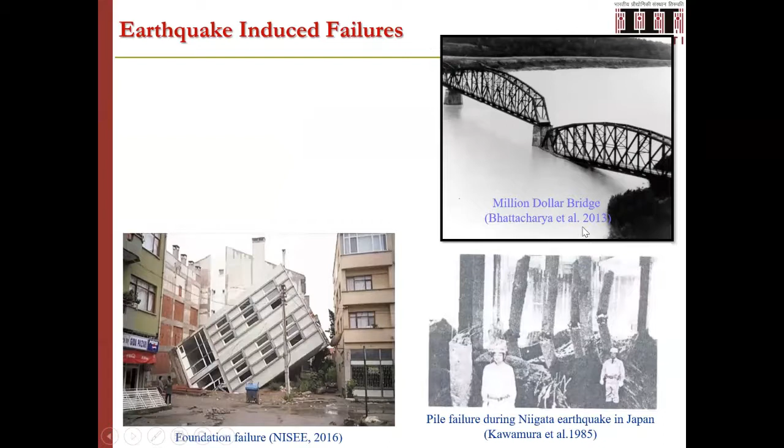Little more closer to these failures, if you see a bridge failure, a $1 million bridge failed, which was reported by Bhattacharya et al. 2013, and also foundation failure. If you see, the structure was totally intact. So the reasons for this one, is it superstructure failure or foundation failure? Of course, the examples we are showing here are not structural failures. The foundation failures are significant here.

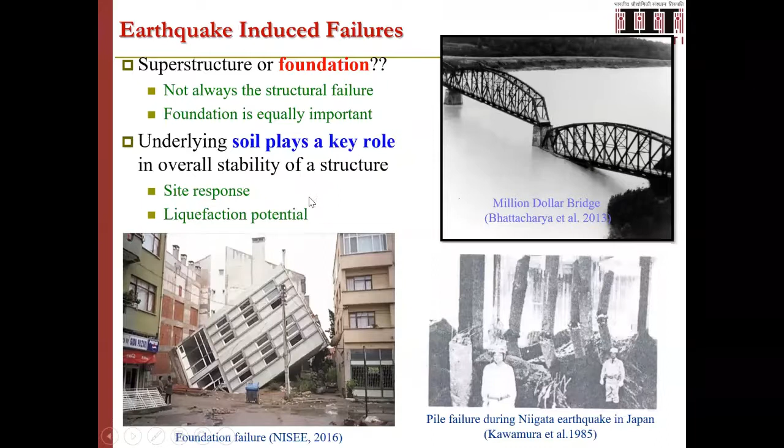So in general, in all the failures, not really the structural failures, some foundation failures also will be there. The underlying soil for any structure plays a key role in the overall stability of that particular structure, in terms of the site response to a particular earthquake motion, or in terms of the liquefaction potential at that particular earthquake condition, how it would behave. So that's how it will define the whole earthquake scenario and disaster scenario.

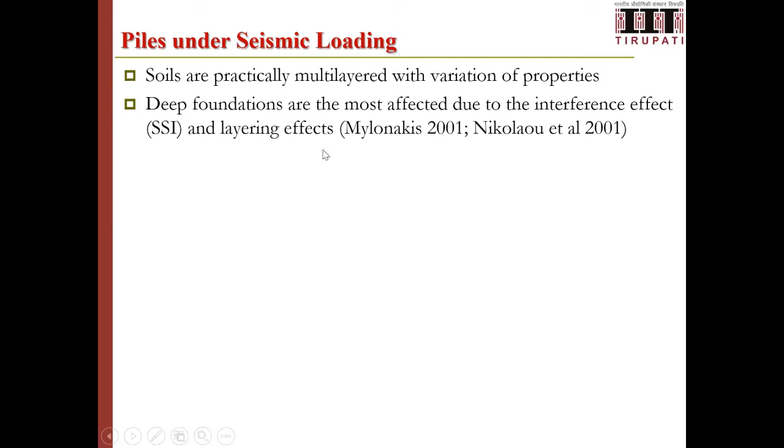So how do piles behave under seismic loading? With these quick examples, let us put out some points here. Soils naturally exist in multi-layered soils with variation of the properties. So this is one point to note. There is a different contrast in the layer properties and layer behavior under a particular given earthquake condition. And in many of these earthquake conditions, the deep foundations are most affected due to the interference effects and also layering effects, which generally affect the whole pile foundation behavior. So these ground conditions strongly affect the pile behavior in terms of changing the failure mechanism.

There are different failure mechanisms. I'm not going into details like bending failure and buckling failure, etc. So the failure mechanism will play an important role in the design. And the location of the zone, the ground where it is located, what is the seismicity of that particular condition, also significantly play a role in the performance of piles under seismic loading.

And particularly, the problem of soil liquefaction significantly affects the pile behavior. When the soil is going to liquefy, there is a substantial loss of strength and stiffness because of the increase in the pore water pressure. So the lateral confinement of the pile foundation would be lost. Then obviously the pile behavior would be totally changing. The natural frequency of the whole ground would be differing, and the response to the particular earthquake motion would be differing. All such issues would be arising due to the soil liquefaction condition.

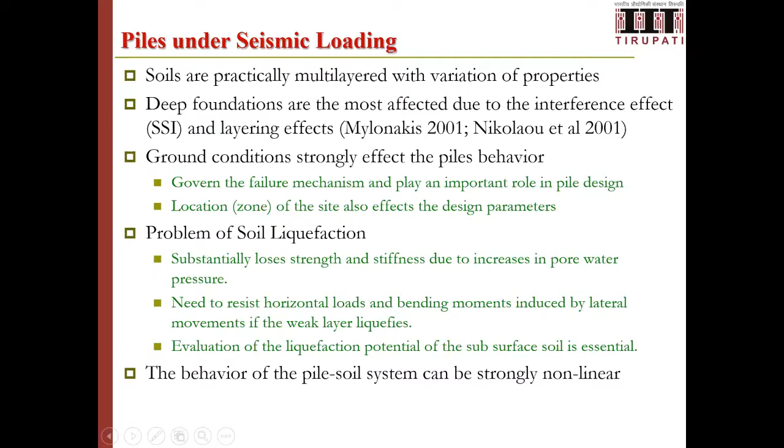And when the particular ground is subjected to the earthquake condition and also the possibility of soil liquefaction, the whole pile-soil system would be going into non-linear conditions: non-linearity of the soil behavior, non-linearity of the pile-soil interface behavior and pile behavior, etc. All those things would be coming into picture, which completely make the whole problem a complex dynamic soil-structure interaction problem, which we need to handle to solve this particular one.

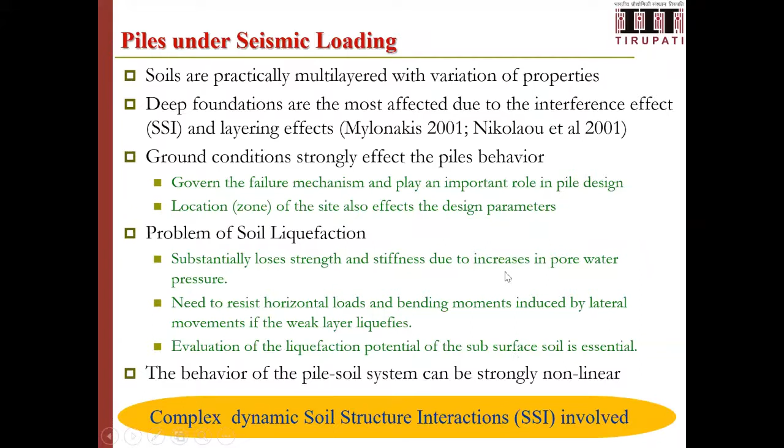And surface earthquake waves which are generated from the source travel to the site, and from the site bedrock they travel upwards, right? And then it affects the structure. So we need to take all these effects into consideration while analyzing any structure for seismic assurance, stability assurance. So considering all these things, this is an integrated seismic analysis strategy for any geotechnical structure, we can say, but particularly it is mentioned here as a pile foundation.

So what do we need to have? We need to have different input parameters. One is the seismic hazard assessment of the particular site: the PGA values, the magnitude values, the nearby seismicity, past earthquake levels, all those things we have to study. And at the particular site where the structure is located, the ground profile and possible groundwater conditions are required, and then the type of structure that is coming, what are the loads, etc. Those details also need to be there.

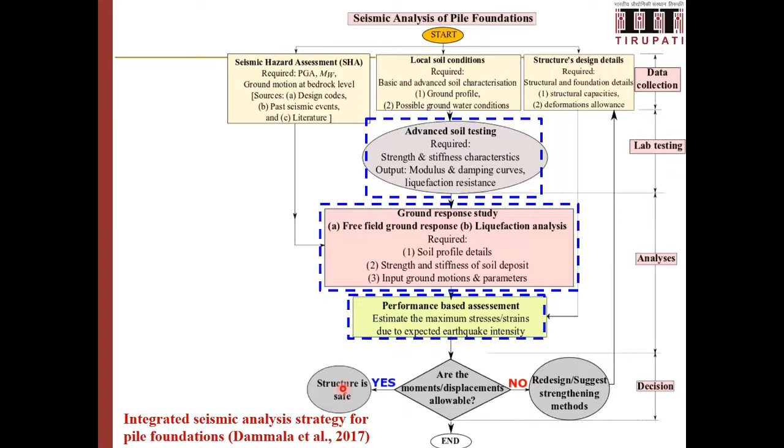And then we have to do the performance-based assessment. The particular structure analysis needs to be done to see whether the structure is performing well or not. If the performance criteria is satisfied, it's fine. If it is not satisfied, then we have to revise the designs, whether ground modification, pile foundation design, or superstructure modifications, etc. Finally, we have to close whether the structure is seismically safe. So in this whole process, there are various steps involved.

Step one is the quantification of the seismic hazard. As mentioned, we need to obtain the expected PGA, moment magnitude, etc. And when a structure is a complicated, very sensitive, huge budget structure, one can perform the site-specific deterministic seismic hazard analysis, DSHA, or probabilistic seismic hazard analysis to get the ground motions at the particular site. This will be done for very highly sensitive structures, for example, nuclear power plants. Otherwise, we can also use other literature data, and for normal general structures, we can use the code provisions for quantifying the seismic hazard or seismicity of a particular area.

Coming to the second step, site characterization and site response analysis, where we need to obtain the soil information in terms of layering and also dynamic characterization, liquefaction potential, etc. The obtained parameters shall be used to conduct the free field ground response analysis by any of the methods available. And the data obtained from these two steps will be used for performing the integrated seismic analysis, considering the superstructure and the ground condition effects, to get a complete picture and complete performance behavior of the intended structure under consideration.

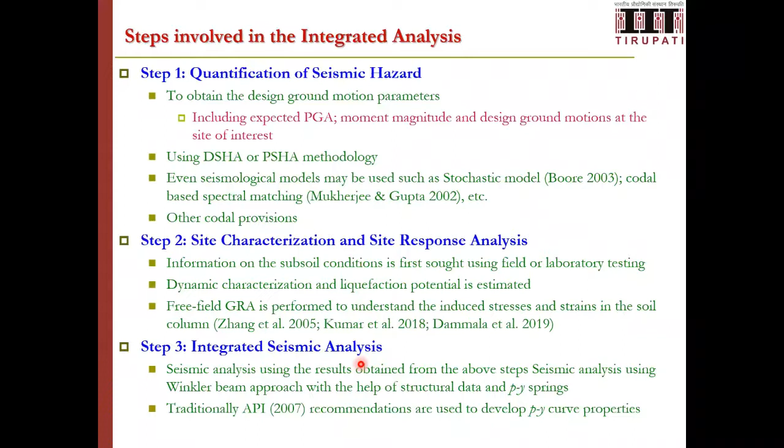Then comes the third stage, seismic analysis of deep foundation. The objective of the seismic analysis is to estimate the induced stresses in the pile elements due to external loading, and also the resulting bending moments on the pile. That is what is important. We have to make the piles strong enough to withstand the shear forces and bending moments generated in the ground due to the earthquake motion. Various methodologies can be adopted. Initially they were all based on the subgrade reaction based Winkler approach, which several researchers have applied. Here the soil is modeled as Winkler springs, the pile element is considered by different methods, and together they get the response of the structure.

Then we can have the advanced continuum approach where we completely model the ground structure, etc. by appropriate numerical models, for example, finite element method, boundary element, or finite difference method, etc.

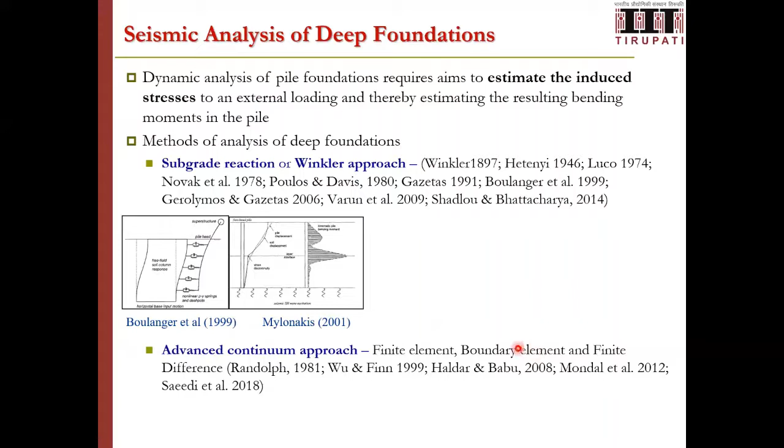Several studies are there, and then one can adopt the physical model studies. For example, if the structure is very complicated, they can go for physical model studies like 1G shaking table tests, centrifuge tests, and full scale load tests, and all.

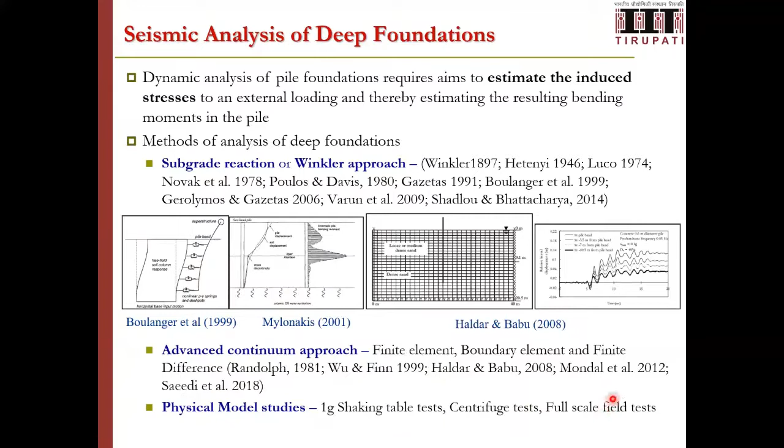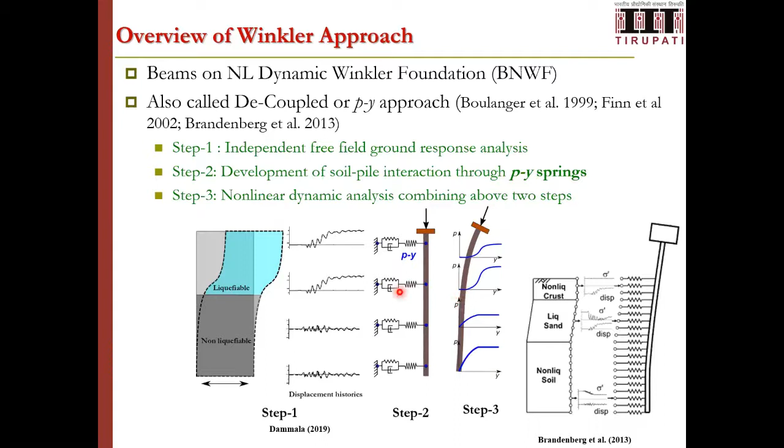So the ground response obtained at different spring levels will be given as an input motion to the springs, and accordingly we can obtain the response of the pile, so that the complete behavior can be studied.

In the whole scenario of this problem, finding the p-y springs is a very governing parameter. Of course, there are codal provisions. Generally, API 2007 recommendations can be followed to find the soil springs.

However, the API code generally provides only for standard soil without considering the liquefaction effect and associated decrease in strength value. In the case of liquefiable soil, certain modifications need to be adopted considering realistic conditions. One is to neglect the total soil springs in the liquefied zones, so that area will not have any lateral support.

Or then treating the liquefied sand as a very soft clay having very low strength can be taken. Or another method is the P-multiplier approach, reducing the strength of P-y curves by some factor, which was recommended by Brandenberg et al. in 2007.

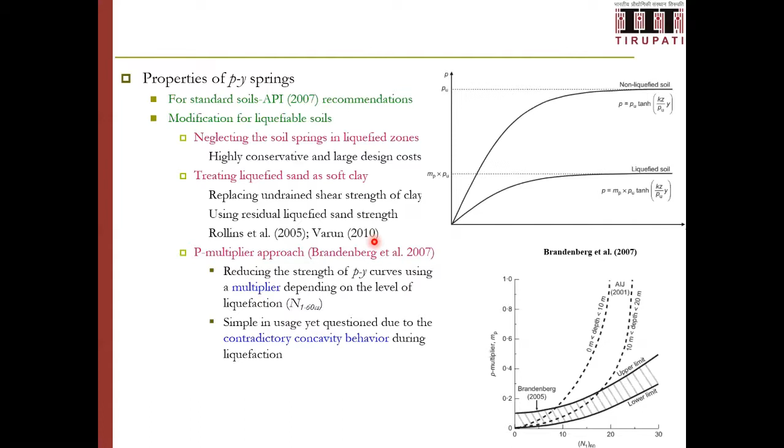So based on these methods, one can choose appropriately. The soil strength can be deferred, the spring constants can be changed considering the realistic scenario of the earthquake condition. So this is the whole strategy of dealing with the study.

Now let me quickly take the example application considered and presented in this particular paper, to show the whole strategy of how it is implemented: a pile supported structure in a highly seismic zone, that is the Tezpur city of the Assam zone, is taken.

The Assam and Tezpur city is marked as zone 5 as per IS 1893-2016. In this particular area, two configurations of pile foundations were taken: one is a single pile having 0.6 meters diameter and 26 meters in length, and another is group piles, 2 by 2 group piles, a 4-pile group of similar geometry. The strength of the material has been taken as M25 grade RCC concrete.

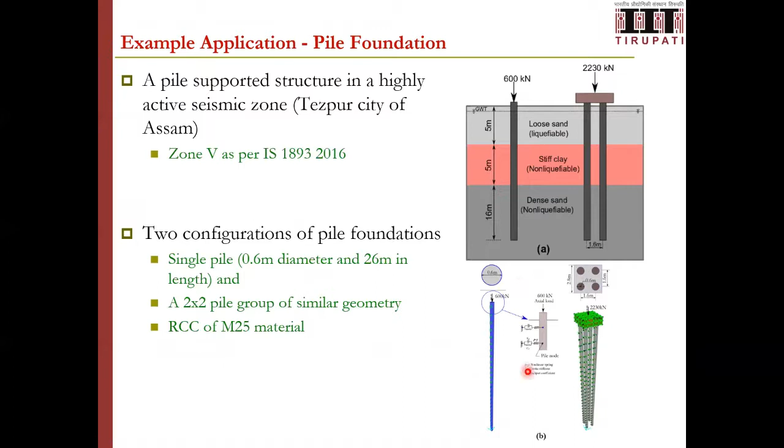Now we'll take the step-by-step approach to demonstrate the whole thing. The first one is the quantification of the seismicity. The particular Tezpur city, Assam city is shown in this area, the northeast zone.

If you look closely, what is the seismicity of this area, what are the number of faults, what are the previous earthquake data, all can be seen in this figure. Of course, this data is obtained from literature. Basically Raghukanth et al. has thoroughly studied this particular earthquake scenario, and also they generated a stochastic synthetic ground motion for this area, considering a very high earthquake magnitude of 8.7.

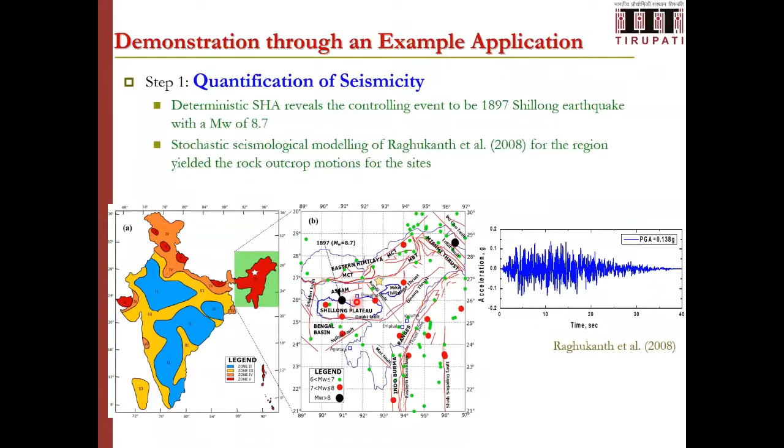Because this literature is currently available for this particular area, we have adopted the Raghukanth et al. ground motion, whatever is recommended in his paper, considering all the seismicity of the area and other parameters. So that's about taking into consideration the seismicity.

Next is the seismic site characterization and ground response analysis, the second stage. If you see the soil profile at that particular site, it comprises three predominant layers: loose sand up to the top 5 meters, then a clay type of soil, represented here as red soil, extending up to about 10 meters, and below that about 16 meters of high dense sand, and below that rocky strata.

As we are dealing with earthquake effects, dynamic soil properties and dynamic characterization are important. In terms of shear wave velocity, that is shown. Additionally, we need strain-dependent dynamic properties, particularly the shear modulus and damping ratio for the particular site, which we need to determine.

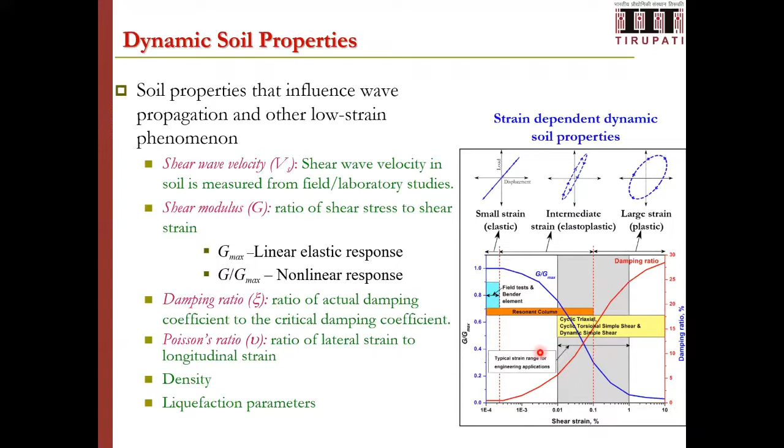This particular figure also indicates what strain ranges a particular test can be used for, which can be seen here. Accordingly, we can adapt this particular testing program.

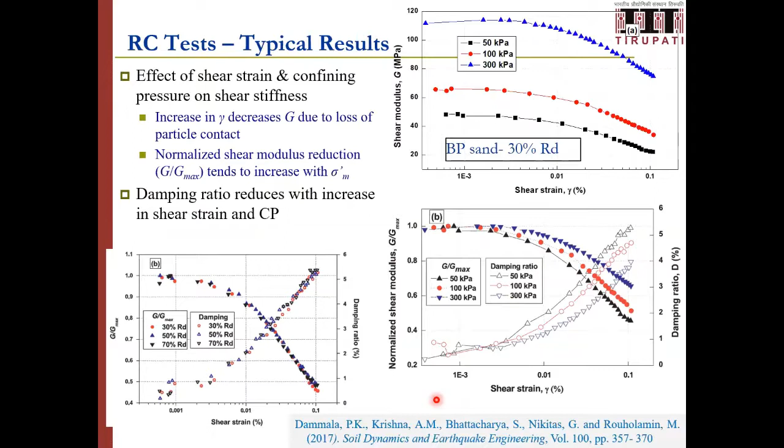This shows the soil profiles, and these are some typical results obtained as part of the dynamic characterization, which have been published in various publications. For any further information, one can go through these documents. This is comprehensive data for G by Gmax and damping ratio curves.

This particular data was published in 2019 in the Frontiers in Geotechnical Engineering book chapter. Here, bender element tests and resonant column tests were put together, along with the dynamic simple shear test results, to get the complete picture of the G by Gmax curves for the complete range of strains.

Similarly, you can see the damping ratio curve variation over the wide range of strains. There is another publication which used the resonant column test data and cyclic triaxial test data for a particular soil to completely capture the modulus response and also the damping ratio response.

The important finding from our studies is that when we test the soils for very high shear strain levels, the damping ratio decreases beyond 1% strain levels. Only a few literature have reported such behavior, which needs to be taken into consideration for the analysis.

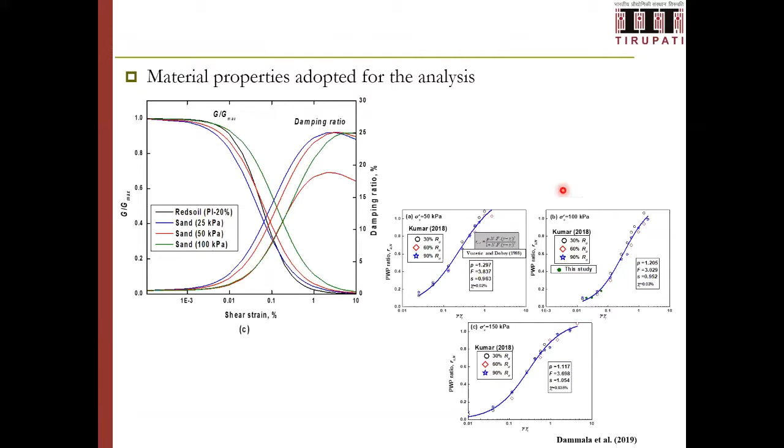Referring to the earlier figures, the final data chosen for this particular study: this is the red soil having a plasticity index of 20%, and sandy soil having different confining pressures, showing what the G by Gmax values and damping ratio values are.

Nonlinear pore water pressure generation models have been used as per these figures. The data obtained from this dynamic characterization has been used to get the ground response analysis, that is the site response analysis using DEEPSOIL, which is an equivalent linear or non-linear approach for obtaining the ground response, and is an open source program with a lot of features for getting the ground response.

You can see the soil profile here. We already discussed about the earthquake data. So these both things, along with the input parameters obtained from the dynamic characterization in terms of VS, Gmax, G by Gmax curves, damping ratio curves, and liquefaction parameters in terms of the pore water generation model, etc., would be taken.

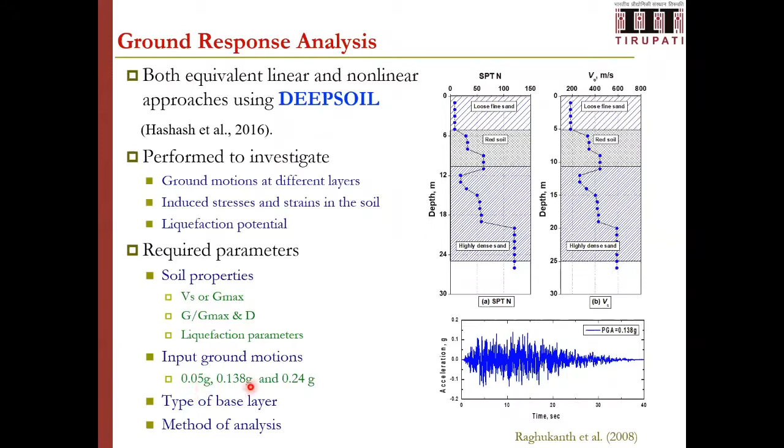The ground motion selected from Raghukanth et al. was originally at 0.138 G level. But to represent different scaled motions, the ground motions are modified to scale to 0.05 G and 0.24 G to represent three different earthquake motions.

That means your pore water pressures have significantly shot up and strains show more and more damping, so the ground response is totally different. These captured behaviors should be incorporated directly into the ground motion.

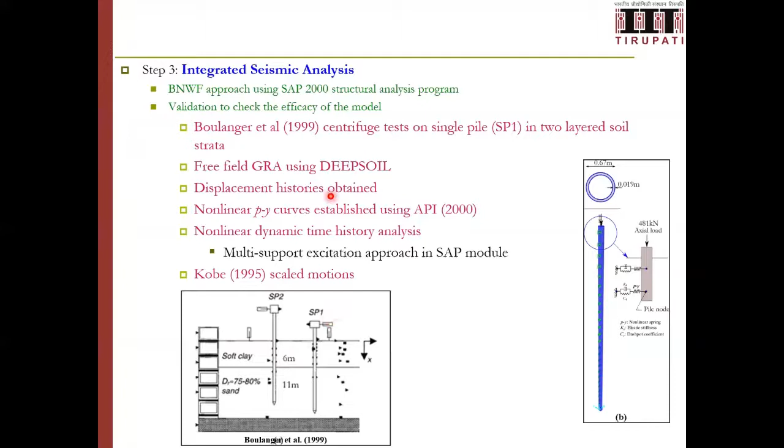So now coming to the integrated seismic analysis. The Winkler spring model analysis has been modeled using SAP 2000. This is the typical SAP 2000 model shown. Before adopting the particular model for our study, validation of the model is essential. So it was adopted to verify Boulanger et al. 1999. This paper presented both the centrifuge model test as well as the Winkler spring approach. Both results were available. The data were taken and all the models were simulated to verify it.

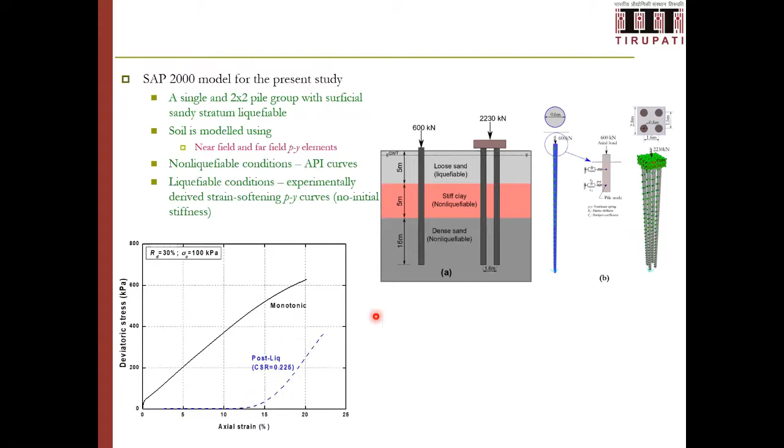These are the spring constants; the deviator stress and axial strain for the normal pile springs were obtained as per this. In the cyclic triaxial test, after liquefaction, a post-liquefaction strength also has been determined as per this curve. This is the direct deviator stress and axial strain data. This data has to be used to calibrate and get the spring parameters, which were modeled and given as the spring parameters.

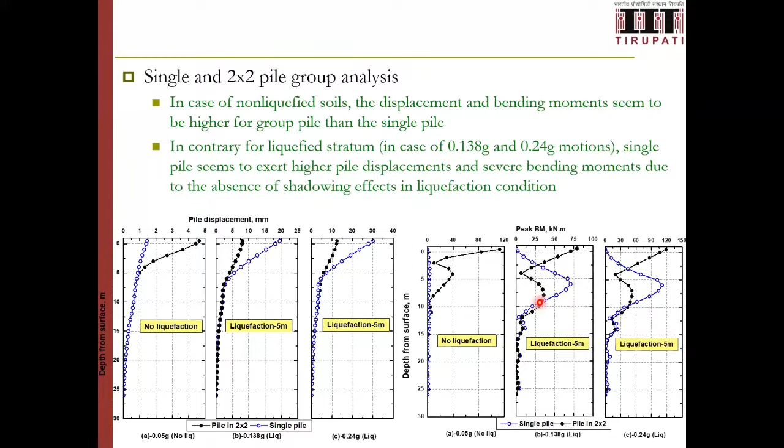Yeah, so with that, I'm concluding my talk. What we tried is an integrated approach for seismic analysis, presented as a simplified method. Various components have been discussed, and a huge contrast of response is possible at the junction of liquefiable and non-liquefiable soils. The point to be noted is the 2x2 pile group yielded much less deformation compared to a single pile under the liquefiable condition. The simplified BNWF-based integrated analysis seems to simulate reasonably well, and has been used by different researchers across the globe.

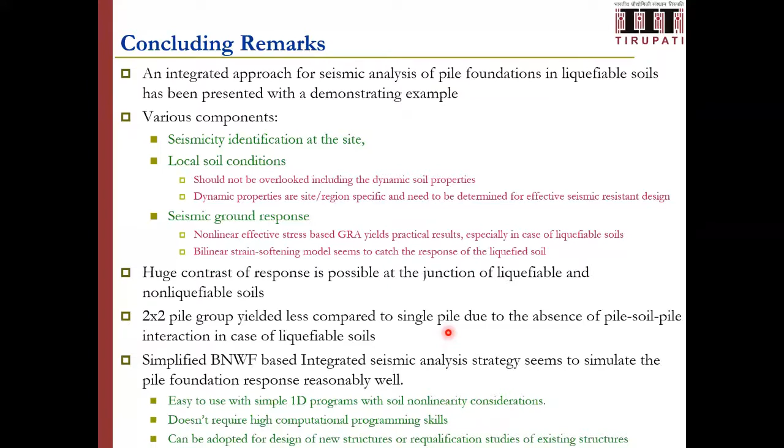Many structural engineers, of course, adopt it. The advantage is it's easy to use 1D programs. It does not require high computational programming skills, and it can be adopted for designing new structures as well as requalification of existing structures of moderate importance. For highly important structures, where the budget is available, one needs to go for sophisticated site-specific analysis using continuum analysis. So with that, I thank you all for your patient hearing.

Sorry, Chairman, if I exceeded a couple of minutes. Thank you. Very nice, exhaustive lecture, compiling from top to bottom, from the earthquake to how the pile or superstructure behaves. Thank you very much. We'll have the question and answer at the end of these sessions, which will be taken care of by our co-chair.

Now let us go for the second lecture, because in the question box there are no questions. Anyhow, the questions will come now. So we'll have the questions at the end. Okay, thank you. Thank you all.

Now we'll go for the second lecture, which is by Abhishek Kumar, IIT Guwahati. The title is Importance of Site-Specific Observations at Various Stages of Seismic Microzonation Practices. Dr. Abhishek Kumar is an Associate Professor at the Department of Civil Engineering, Indian Institute of Technology, Guwahati.

His research areas include seismic source characterization, forward and inverse ground response analysis, seismic hazard assessment, and development of regional ground motion prediction equations. He has published more than 30 journal papers, 26 conference papers, and has guided several PhD students and MTech and BTech levels.

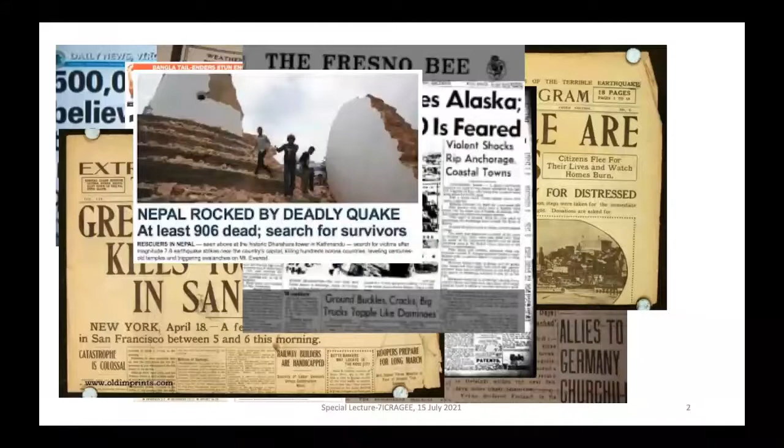So when we talk about earthquakes, generally we talk in terms of damages which have been witnessed by the people living in the area or reported in the newspaper. But we all know that it's basically the shaking which is happening because of the transfer of waves between the source and the site, and how the system responds, whether it is a soil, a building, or other utilities. It may undergo partial damage, no damage, or complete collapse.

Same way, if you look into some of the damages witnessed in different earthquakes in and around the Indian subcontinent, you can see 1897, 1905, 1934 Bihar Nepal earthquake, 2005 Kashmir earthquake. This is just to give you an understanding of what kind of damages have been witnessed in the past, and considering the population density, particularly along the Himalayan belt and many important locations in the northeastern part, if this kind of earthquake gets repeated in the future, what will be the level of damages one can expect. So that also gives a hint. We have to go for site-specific, more detailed investigations in comparison to the ones done in the past.

A list of significant earthquakes. We know about the 1897 and 1950 earthquakes, but if you explore the history, we can find significant damages because of earthquakes as early as maybe 1100, particularly in the Himalayan belt. Starting from the 1255 Kathmandu earthquake, you can have details about how many fatalities there were. And recently in 2015, we had the Pokhara earthquake, west of Kathmandu, which caused almost 10,000 fatalities as per official record, and many more damages.

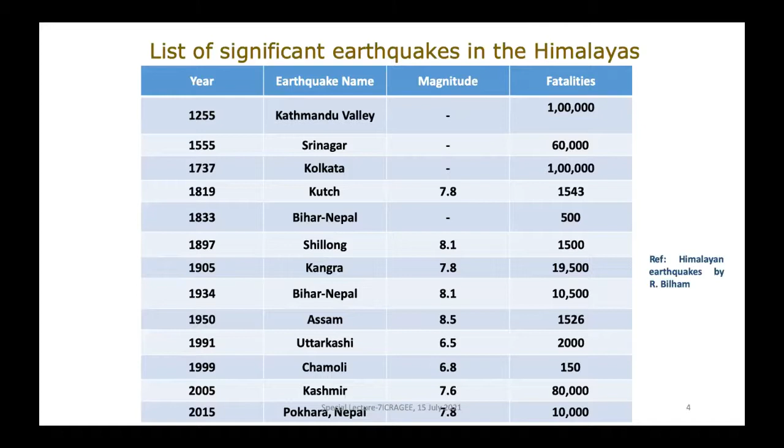And very recently in Assam, on 28th of April, we had another event in Dhekiajuli, which caused widespread liquefaction in different parts of Assam. So we are hearing something from history based on the literature available. At the same time, we are seeing, even from major to moderate earthquakes, what kind of damages we are experiencing now. And we have different seismic gaps in the Himalayas, even Assam. So what is the seismic scenario we have to be prepared for when designing important infrastructure like bridges and tunnels, because in the northeast and other parts of the country, from a strategic point of view, a lot of infrastructure development is under process.

So an earthquake is basically the release of built-up energy at the source, that is the focus, and then it travels to different distances around the epicenter, depending upon the characteristics of the medium through which it is propagating.

Sometimes there will be heterogeneity, sometimes there will be scattering, intrinsic attenuation, as a result of which, even at the same distance around the epicenter, the ground motion characteristics which one is going to see based on the ground motion records will be different. So in a wider sense, you can see there is a source and there is a site. Under the site, you are having local soil, which we generally understand based on local site effect, as discussed by Professor Murali Krishna also.

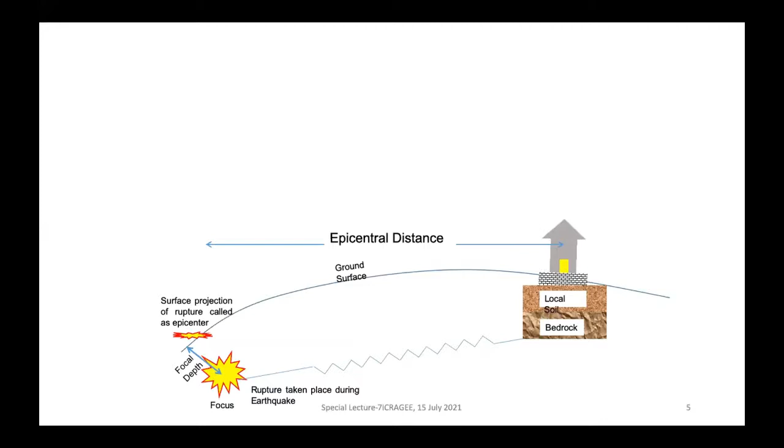And then beneath the local soil, we are having bedrock, having shear velocity 1500 meter per second or above that. So generally, from the source to the site, waves will be passing through the bedrock or crustal medium, and then these will be subsequently altered or amplified because of the presence of local soil before reaching the foundation of the building. Overall, you can see the entire process can be divided into source, propagation path, and site characteristics.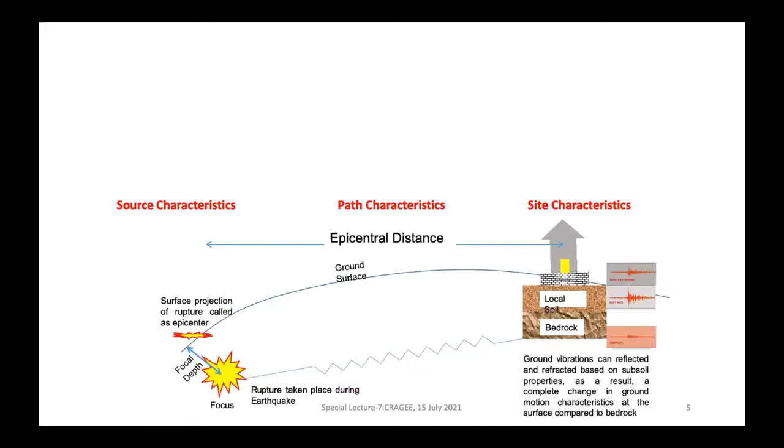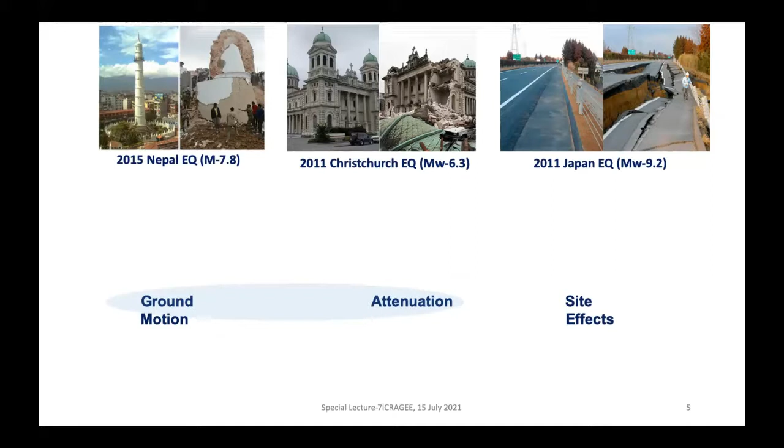So primarily you can go with ground motion generated at the source, how these are getting attenuated, de-amplified or amplified. Collectively, it can be understood based on seismic hazard analysis, which also requires ground motion prediction equations, and then local site effect. So one can go for geotechnical, geophysical testing, indirect measurements also, and then quantification of induced effects like liquefaction.

Now, when we go for microzonation practices, depending upon the terrain type, depending upon the seismic activity of the region, we try to understand what is bedrock level seismic hazard analysis, what is surface level seismic hazard analysis, plus in addition to that, if it is hilly terrain, what are the chances of landslide occurrence, if it is plain terrain with subsequent overburden, what is the local site effect dominating in the region, and so on. If the terrain is changing very widely, we take that into account also.

And then collectively giving different weights to different thematic layers which are contributing to the overall hazard or hazard index, we can club all those thematic layers and come up with the microzonation maps. So there are different kinds of inputs which are required at different stages, and different outcomes after the processing. For seismic hazard analysis, you will be getting rock level or surface level, depending upon the inputs considered. How much is the PGA value expected at the site?

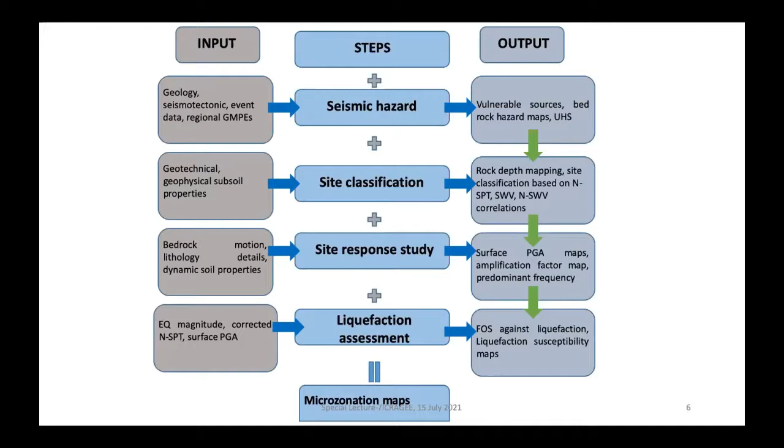If it is based on the deterministic one, you will get the worst scenario. If you are interested to find out what is the most probable ground motion at the site, you can go with the probabilistic one, which will give you the probability of exceedance or the confidence at which you can propose the level of ground shaking.

Now, the observations which I'm going to discuss here are, first, identification of seismic sources, or some information which can help you in understanding more accurately the seismic activity which the region is witnessing from time to time and which may or may not be part of the known earthquake catalog. Second one is site classification of earthquake recording stations, because whatever data we are using for study have been recorded on different stations. So the information about seismic site class of those recording stations is equally important. That enhances our confidence in using those data.

Third one is path attenuation characteristics. As I mentioned, between the source and the site, a lot of parameters will be there which control the ground motion characteristics. So how that can be addressed. Then development and selection of ground motion prediction equations and their assigned weights. We have some observations; I'm going to share those. Source characterization, and then local site effects, and then I'll go to the conclusion part.

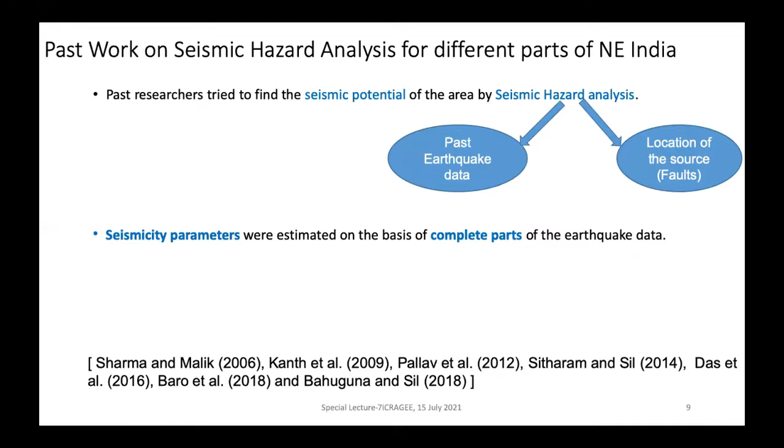So first the source characterization, identification of the sources. Now, our earthquake catalog is mainly composed of past earthquake data as well as the data since earthquake recording started, primarily after 1980. The 1986 Dharamshala earthquake we consider as the first earthquake for which ground motion records are available. But if you explore, different literatures have used different durations of earthquake catalog whenever they go for the determination of seismic activity, completeness analysis, and even for declustering work.

What actually happens, you can see over here, different earthquake catalogs, and the more information we have for the catalog, the more confidence it will build while we are determining the seismic activity parameters or seismic hazard values.

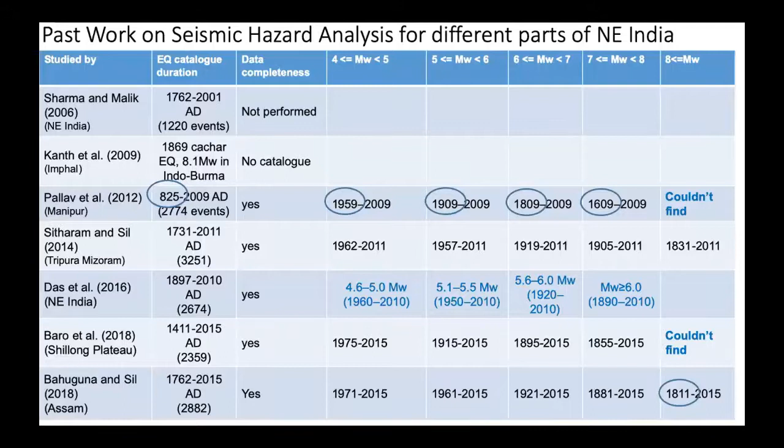But most of the things, when we start hazard analysis, we take into account the information which is known to us at the present. But at the same time, we are having different signatures from time to time, particularly from historic earthquakes like 1897 or 1255 or so many earthquakes, which have triggered liquefaction, or indirect evidences, which can be called seismites also, which give an indication that it's not only the duration in which we have earthquake records that the region was seismically active, but in the past also. So you have to take those considerations also into account.

That will give you what are the possible sources available in the region, which one has to understand based on detailed site investigation, or we can go with literature before planning for any site-specific investigation. One is this one, where you can see in the history there was some earthquake which induced liquefaction. When liquefaction occurs, there will be generation of pore water pressure. When it dissipates, it creates some kind of sand blows at the surface.

But if this has happened maybe 200, 300 years before the present time, these characteristics might be stored somewhere in the stratification. So one can go for detailed investigation at the site. If you go in further detail, that can also give you an idea about what was the source or magnitude of the earthquake which triggered it. And you can club those earthquake magnitudes also in your earthquake catalog.

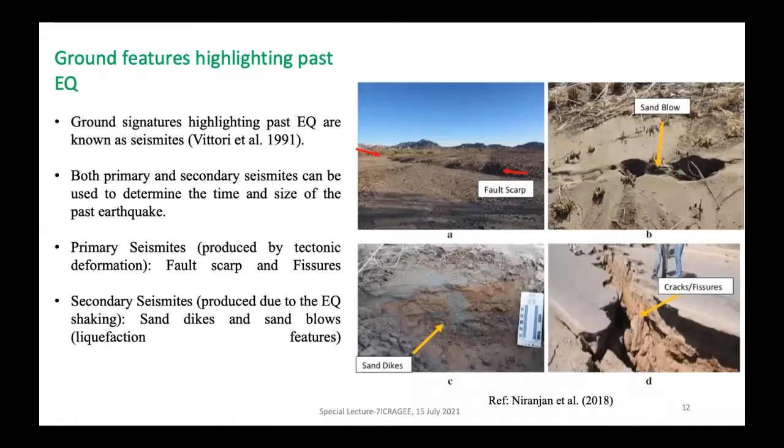Same way, you can also explore with respect to remote sensing and existing literature, where are fault scarps, sand dikes, fissures, all those. That will give you more enhanced information about the sources available in your study area, rather than depending on one or two sources. Because these kinds of studies are a continuous process. So after every 5 to 6 years, you can get maybe some more earthquake information or source information available to you. You can refer to that.

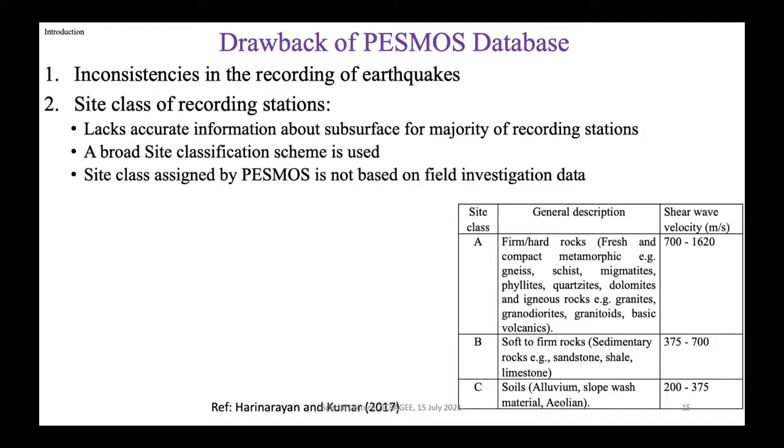Site classification. Recording had started in different parts. But if you see, one is inconsistency because the distribution of those recording stations is not uniform. So whenever there is a source, you might be seeing in one particular orientation you are having records, and in another orientation you don't have any earthquake record. Same way, the classification of earthquake recording station sites was given based on geology. So there was no in situ investigation done, primarily for PESMOS website.

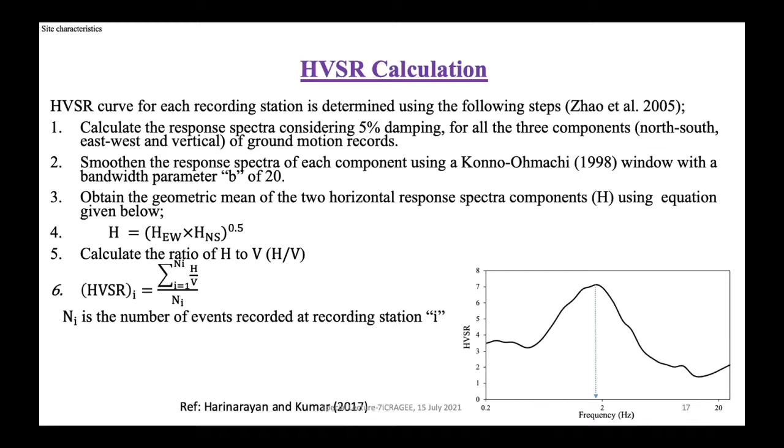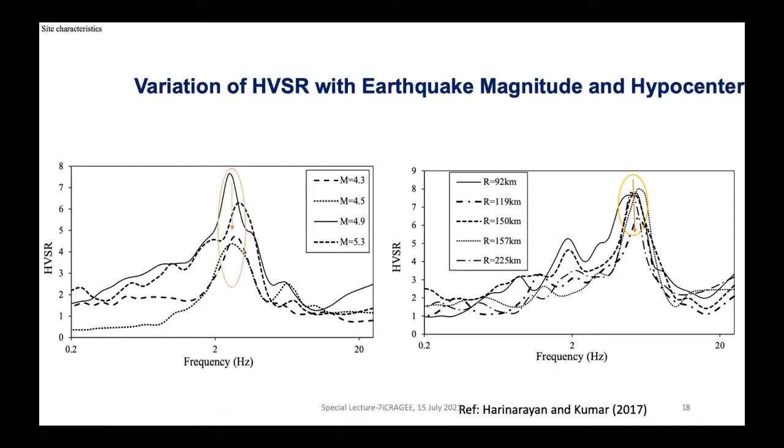So we started doing it for those recording stations, particularly in the Western Himalayas, based on horizontal to vertical spectral ratio, where you'll get to know what is the natural frequency of the particular recording station, and corresponding to natural frequency, what is the amplification or horizontal to vertical spectral ratio at the site. So based on natural frequency, you can correlate with respect to site classification values, and then you can classify a particular site. Subsequently, you can also determine VS30 values. And that's how we determined it for close to 90 recording stations. This is a published one.

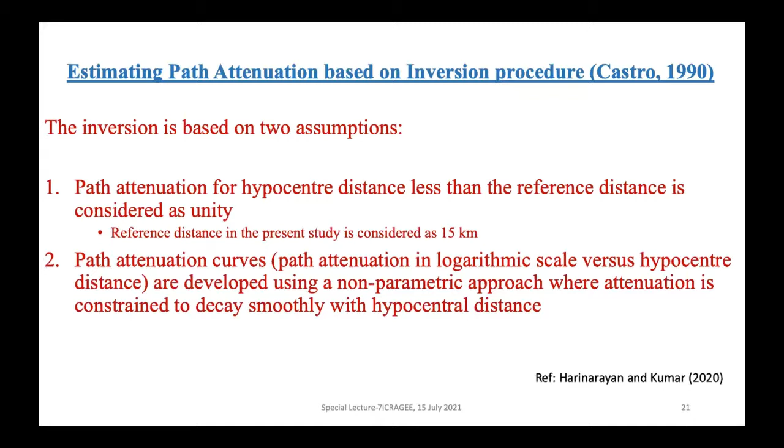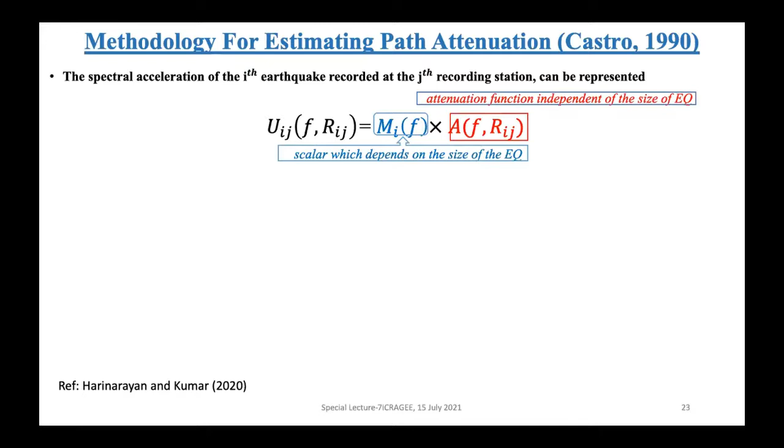So we can solve this equation considering a reference distance where the propagation characteristics will not change significantly. You can solve this equation for determining the propagation path or change in amplification as a function of distance for different frequencies of waves. And that's how you can get to know what is the average attenuation characteristics. This is going to give you, for different frequencies of waves, with respect to the distance, how these are getting attenuated or the change in the amplification function.

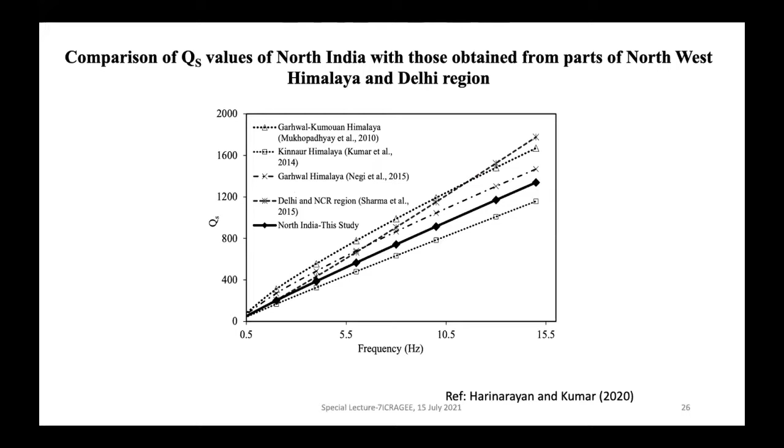Of course, site A and B are relatively stiffer in comparison to site class E. So we had to classify the recordings based on the recording station on which these records were done before using the same for recording stations. We also determined source characteristics and propagation path, as I mentioned in the previous slides.

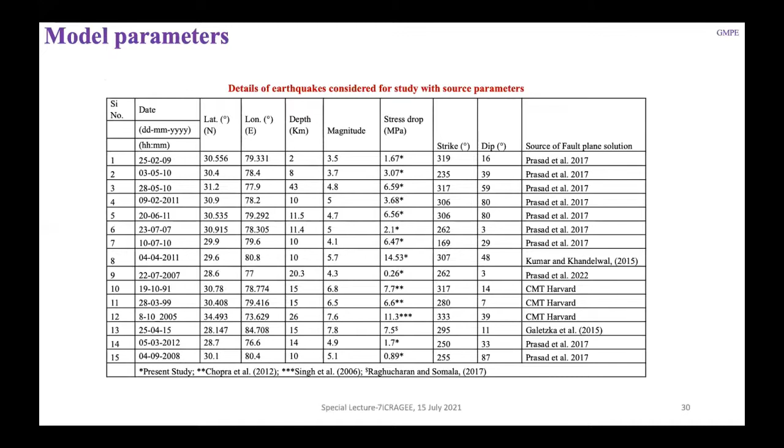So using those source and propagation path characteristics, as well as amplification spectra which we developed for each kind of site class, we tried to generate synthetic motion using the EXSIM program, which was given by Motazedian and Atkinson in 2005. These are the different fault mechanism solutions, stress, strike, dip, and other characteristics, relative to the magnitude, taken from different sources. So for each of these site classes, we tried to generate all these recordings synthetically.

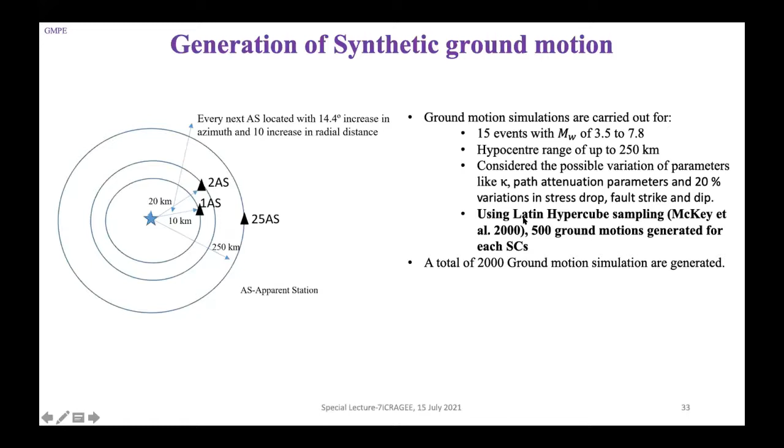After that, we have done regression analysis and tried to develop the ground motion prediction equation for North India for different site classes. So far, this is the only equation available for North India, which can be applied depending upon the site class of the recording station. You can select the coefficient and use this equation.

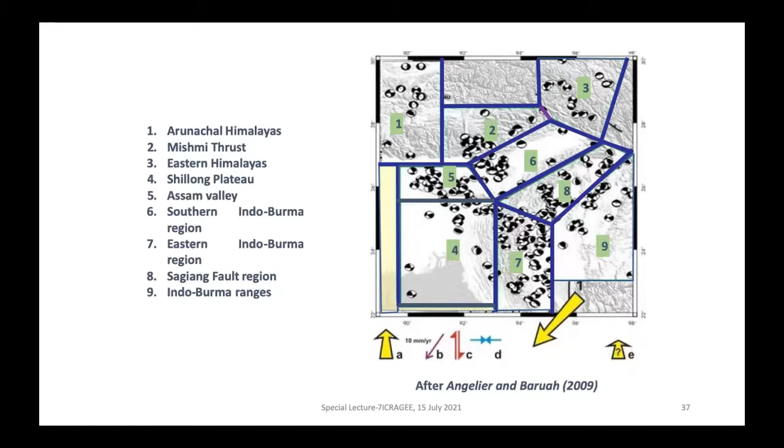Next part is source characterization, because whenever we go for seismic hazard analysis, we consider past earthquake data as well as faults. This is for the northeastern part of India. We have the Eastern Himalayas, the Indo-Burmese range, the Bengal basin, and the northeastern part, which is undergoing some kind of rotation. So in such a case, we cannot consider the seismic activity to be uniform throughout the study area. We have to understand the possible variation in the seismic activity. We have considered particularly the Shillong Plateau, which you can superimpose on the Meghalaya region.

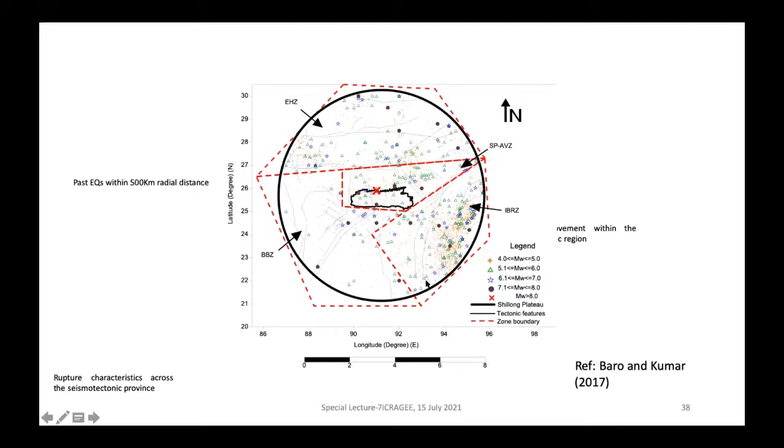So one part is not correlating exactly the same way as the other part of the Shillong Plateau. So if I want to attempt seismic hazard of the Shillong Plateau, I have to consider how different parts of this seismotectonic province are going to respond while contributing to the seismic hazard analysis. Based on this analysis, we consider that this entire 500 kilometer radial distance is not going to remain the same, but is going to behave in 4 parts: Eastern Himalayas, Bengal Basin, Indo-Burmese Range, and Shillong Plateau-Assam Valley region.

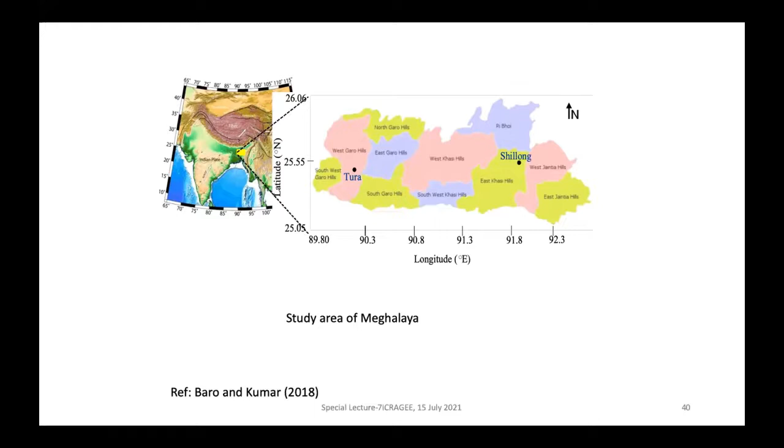Another observation: whenever we go for any study area like Shillong or Tura here, we consider the source characterization definition used in the previous slide. But for Shillong city, the range of epicentral distance with respect to each of those source zones will be different. As a result, the weights or ranks of different GMPEs are going to change. For Shillong, NDMA was found with 0.59 as the weight, but if you move your study area from Shillong to Tura, your weights have significantly narrowed down to Anbazhagan et al. 2013. Same way for other parts also.

So depending upon the size of your study area and the position of your site, the weights of the GMPEs are not going to remain the same, because of the relative position of your site within the study area. This is one important observation, rather than taking the same weights for each GMPE throughout the study area. If you are going for a very large study area, you cannot use the same weights. You have to divide the study area into different parts and then determine the weights and ranks of the GMPEs.

Abhishek, we don't have time. Maybe another 2 minutes maximum. Thank you, so I'll go quickly.

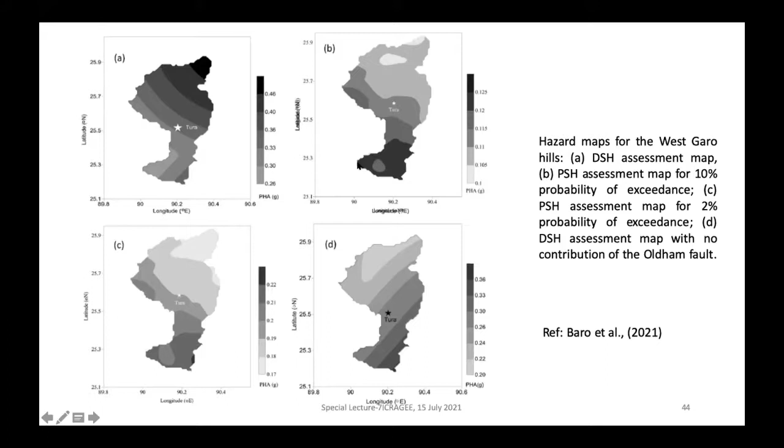The 1897 earthquake was a worst-case scenario earthquake, but if you take probabilistic hazard, the chance of that kind of earthquake repeating in the future will be less, which can be evidenced in the probabilistic seismic hazard value. So the seismic contour has completely reversed when we go for probabilistic seismic hazard.

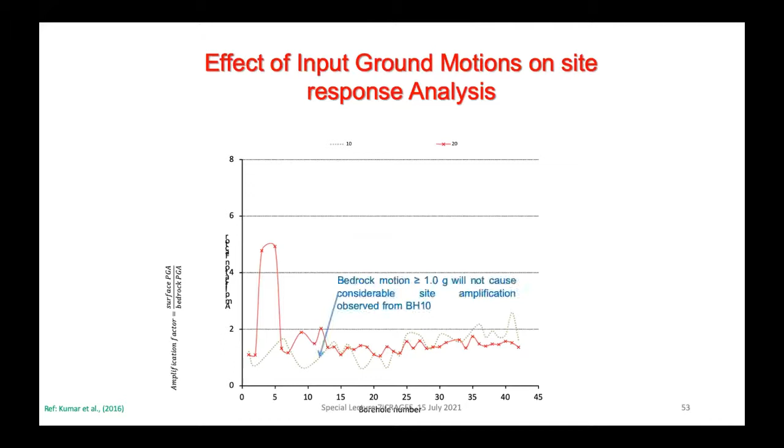Local site effect, I'll go to the observation here, at the same site. If you apply different ground motion, your amplification is going to change. That's why whenever you go for ground response analysis, you have to use more ground motions to get a complete picture of the boreholes' local site effect.

I'll show you here. Depending upon the input motion characteristics, the same soil is going to show amplification as high as 5.5 to as low as 1.0. This is called the dynamic soil response curve.

The same thing was observed for Nepal also. So based on this, one can determine spectral acceleration coefficients also. Okay, I'll stop here.

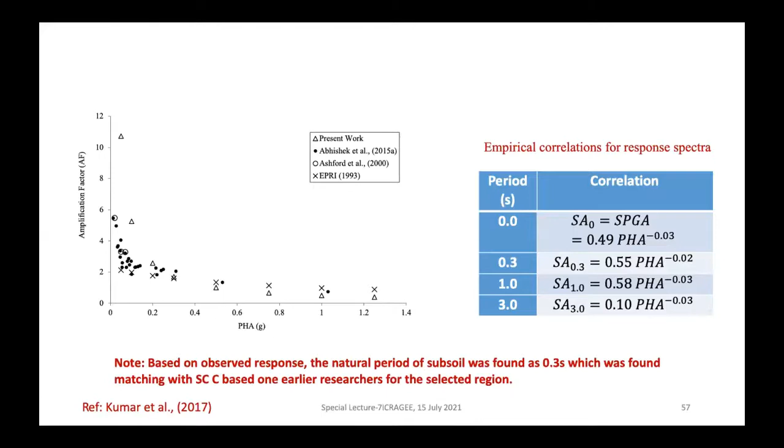I'll go to the observations. Whenever you go for hazard analysis, you have to update your seismic sources. Similarly, extreme events occur, but the probability of the extreme events also has to be taken into account.

Input motion alters local site effects significantly, so that has to be understood. Last point is important: generally, when we go for microzonation practice, we assign high weights to higher amplification as well as higher PHA value, but both of them cannot happen simultaneously, so one has to take that into account.

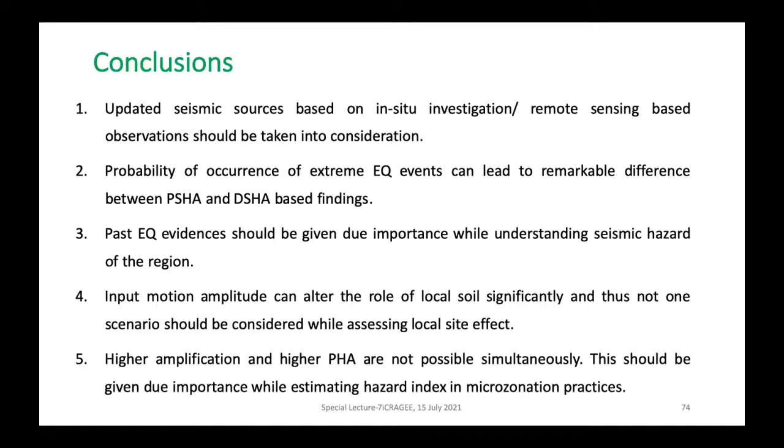Thank you so much. If there are any questions, I would like to answer them.

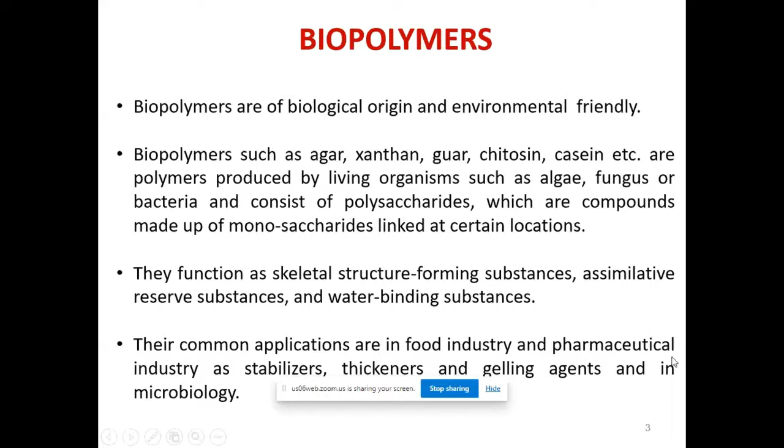Like we have different types of biopolymers available, like agar, xanthan, guar, and chitosin. Many biopolymers are available, and this type of biopolymer is used in different applications, like in the food industry, the pharmaceutical industry, microbiology, etc.

Why should biopolymers be used in ground improvement? It should be sustainable - not only from a strength point of view, but sustainable in terms of environment, economic aspects, and also cost point of view.

It can be sustainable with respect to vegetation, because it helps to grow vegetation. That's why it supports vegetation, and it won't cause harm to the soil organisms. It may be cost effective.

Suppose you are producing a bulk quantity of this biopolymer in the plant - it could not cause harm to the existing structure, and less labor may be required compared to other traditional treatments.

If you look at biopolymer, there is also a specific gel type of biopolymer existing. This gel type of biopolymer fills the pore spaces, and because it absorbs water, it forms a hydrogel.

Because of this hydrogel, it reduces the pore water pressure, the excess pore water pressure built up during dynamic loading. Practically, it could be used in different ways - mixing type, injecting type, or used for building material, pavement, etc.

This slide gives more information about biopolymer use, showing how it is possible to make a biopolymer suspension in the field itself. See, this is the hard biopolymer suspension.

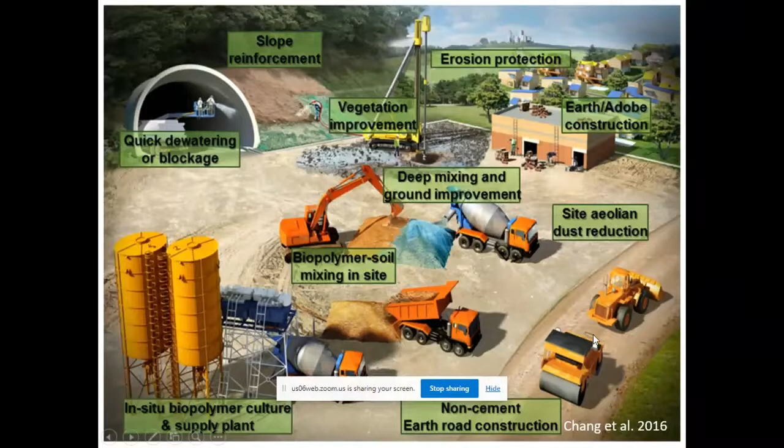Similar to biopolymer, nanotechnology is also emerging in the field of ground improvement technique. It was introduced by Dr. Richard in 1959. The mechanism behind this nano material is that because it has very small size particles, the specific surface area of these nanoparticles spreads very large.

So because of this spreading and increasing surface area, it is spreading between the pores of the clay particles, improving the strength a lot through structure.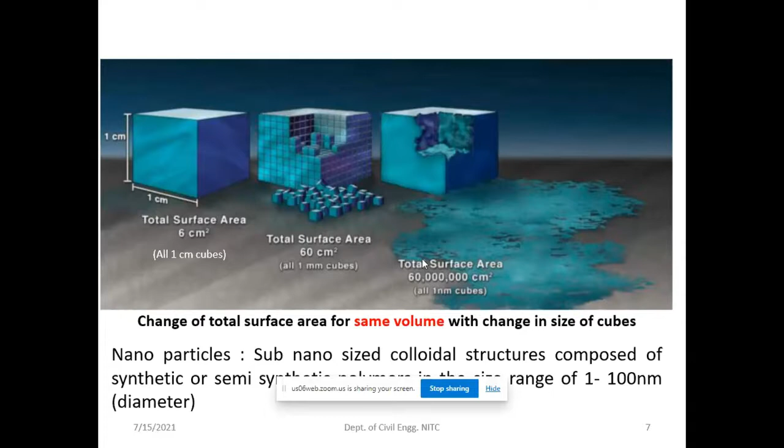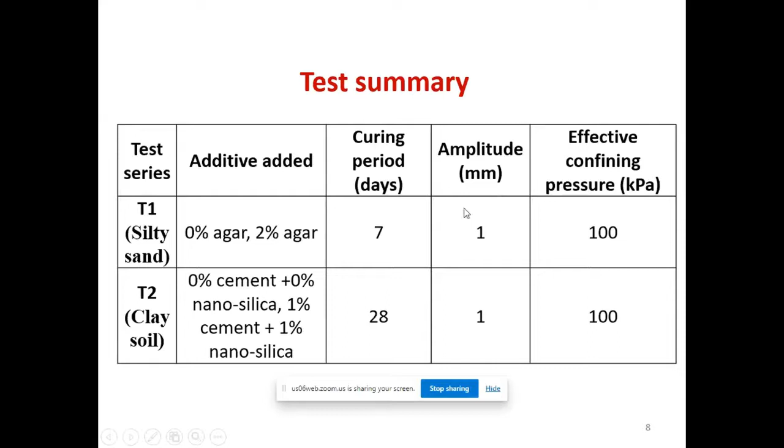Here I'm going to present the test series: test 1 and test 2. Test 1 is the improvement of silty sand using agar biopolymer, and test 2 is improving clay soil using cement and nano silica, with 1% being the optimum dose of nano silica and cement. After making the soil specimens, they are cured for 7 days in case of silty sand, and 28 days in case of clay soil. These specimens are subjected to cyclic loading with 1 mm amplitude and confined with 100 kPa pressure.

First I'm going to explain biopolymer stabilized silty sand. This is the silty sand we got from the local area. These are the properties: gravel, silt, and sand proportions are given, along with specific gravity. The angle of friction is 32 degrees and cohesion is 0. If you look at the gradation curve of this soil...

These boundaries shown are the boundaries for the liquefiable zone, given by Tsuchida 1970. Based on this gradation, since the present soil falls in this zone, it is classified as silty sand, which is liquefiable.

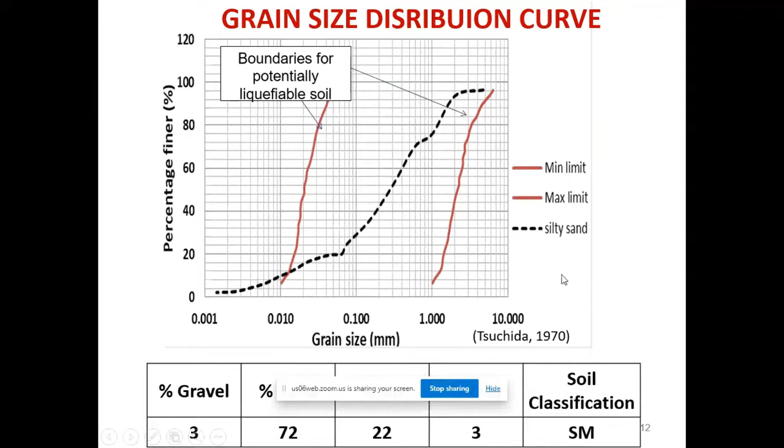In this work, the agar type of biopolymer is used, because this agar biopolymer has some specific features—it's a gel type biopolymer. It melts above 85 degrees Celsius and solidifies below 40 degrees Celsius. It also has high mechanical strength, and of course it is environmentally friendly.

If you see the chemical structure of this agar biopolymer, it has repeating units of the monomer galactose. It repeats completely with OH and CH2O ions. Because of this connective chemical structure, it improves the strength of the soil. Let's see how it will be improved.

These are the biopolymer specifications given by the manufacturer—it is in the form of a white powder.

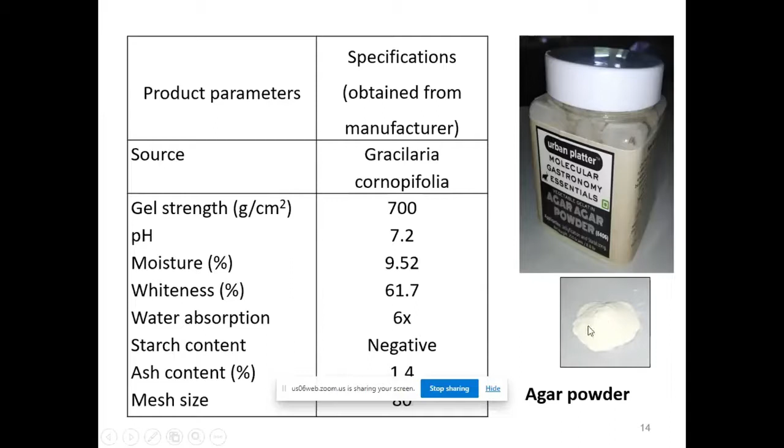First, distilled water is taken in a beaker, corresponding to saturation water content. Then 2% agar biopolymer is added to the soil—that means 2% biopolymer is added to this distilled water. 2% means 2% of the weight of the soil; if I take 100 grams of soil, that's 2 grams of biopolymer. Once the biopolymer is added, it is heated at 85 degrees Celsius to make a hot suspension.

This biopolymer suspension is added directly to oven-dry silty sand. Once this hot biopolymer suspension is poured onto the oven-dry sand, it is mixed uniformly.

Then, to make the cylindrical specimen, we use a split mold. The sides of the mold walls are oiled using a wire brush, and then the prepared soil-biopolymer suspension is placed in the split mold to make the cylindrical specimen in loose condition. This is how we make the cylindrical specimen.

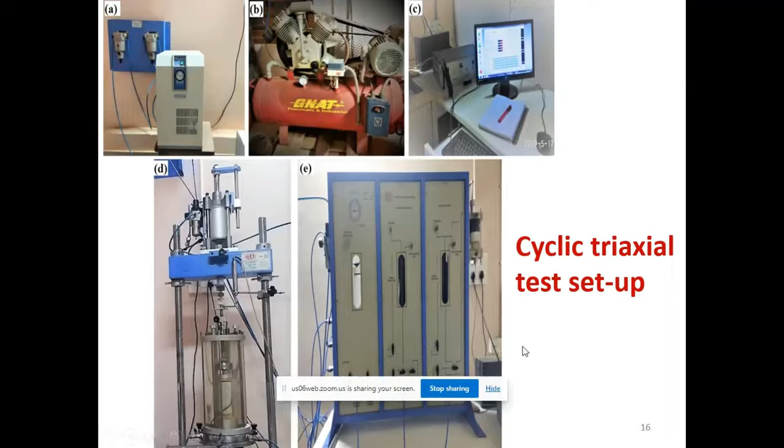After that it is subjected to cyclic load in a strain-controlled mode at 1 mm amplitude to get the result. If you see the result, it is improving the liquefaction resistance and also the dynamic properties of this silty sand. Here you see the pore pressure response with respect to the number of cycles.

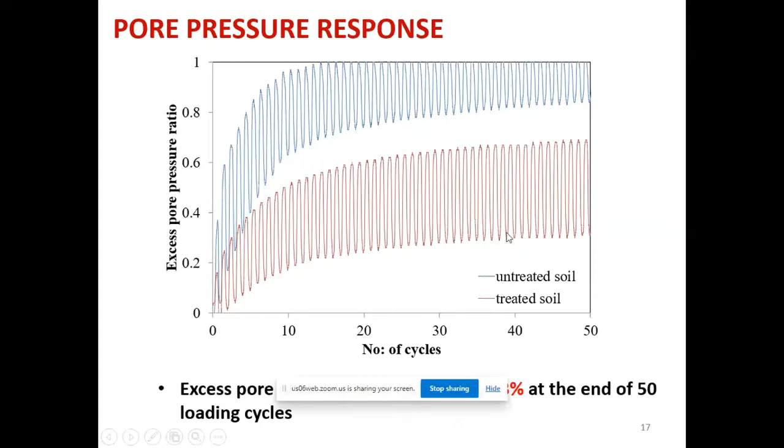That's why it clearly says that treating the soil with this biopolymer definitely improves the liquefaction resistance. Not only liquefaction resistance, it is also improving the dynamic properties of the soil. Dynamic properties are like secant modulus and damping ratio.

The secant modulus is obtained from the inclination of this loop, and based on the area of the loop, we can get the damping ratio. If the inclination is more, definitely the shear modulus is also more. If the area of the loop, the width of the loop, is more, definitely the damping ratio will also be more.

You can see here, this is the untreated and treated one. In the case of untreated, this is a flat slope, and if you come to the treated soil, it has a very steep slope. That means inclination is more. Because the inclination is more, definitely it has more shear modulus compared to the untreated one.

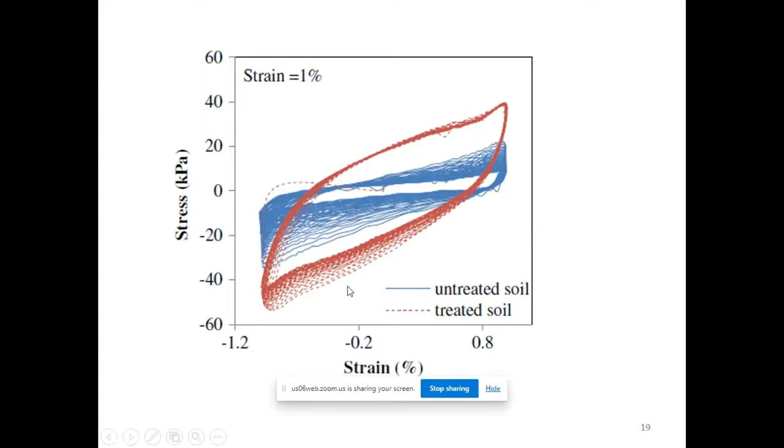Not only that, you can see this wider width; the area of this loop is more in the case of treated soil compared to untreated soil. That means the damping ratio is also increasing with this treatment at 2% of the agar biopolymer.

That is because of the biogel. The biogel is a soft material which acts as a sponge, and there is a transition between the soil and this soft biopolymer. Because of the transition from stiff to soft, the damping ratio is increasing. The gel acts as a damper, absorbing the vibrations. That is maybe the reason here.

This biogel is swelling and it acts as a matrix, interconnecting, so there is a swelled biogel. Because of swelling, the pore voids are filled completely with the swelling biogel. Because of that, definitely the strength is improving.

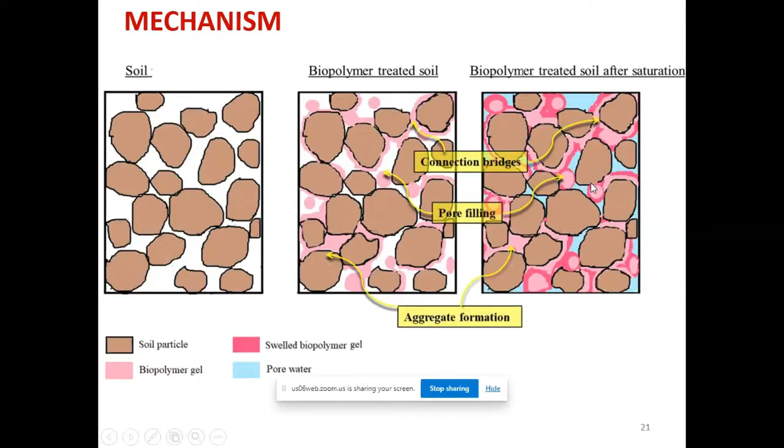From the same analysis you can see that the untreated sand has more pore voids here. The particles are connected by this biogel due to aggregate formation, and the pores are filled by this biogel.

And even during saturation, it is also bridging the connection. The biopolymer bridges this connection. The aggregate layers are connecting. It's a bridging.

So bridging is clearly visible here, how it is connecting these silicate sand particles with the help of this bridging-forming biopolymer. So this is about the biopolymer. Like that, if you come to nanomaterial also, in this study nano silica has been used to treat the clayey soil. So the clayey soil properties are given here.

Professor Rangaswamy, sir, please. Madam, you have to wind up in at least 3 minutes. Yeah. Okay, I'm going to go very fast now, madam. Thank you.

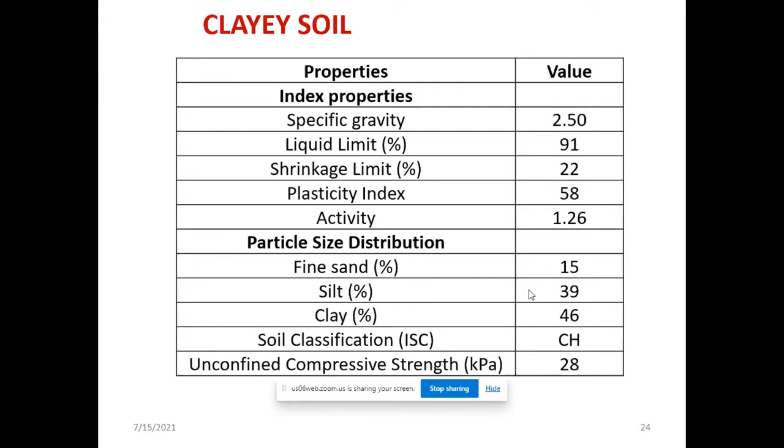This is the properties of the soil. Here nano silica is used; this is the powder form, it is white in color. We have used different proportions of nano silica, but it is found that 1% is the optimum one, because after adding 2%, 3%, because of the very small size, the surface area increases and it's very difficult to mix. It's not possible to get a uniform mix. That's why it is stopped at only 1%. Of course, from an economical point of view also 1% is better.

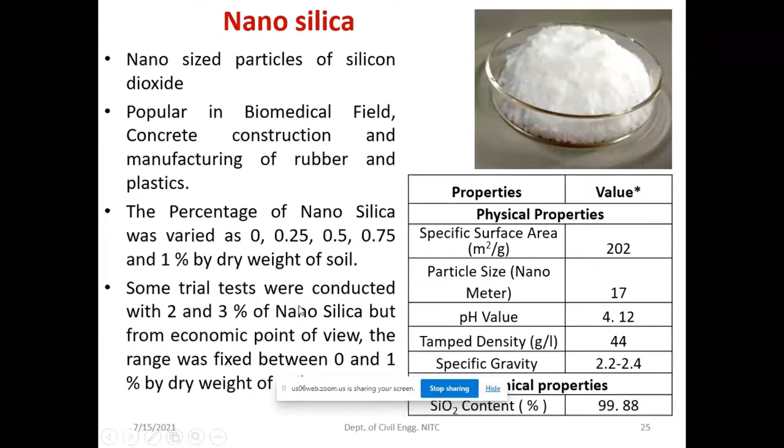To make this specimen, the slurry deposit method is used. The slurry deposit method helps to give a homogeneous clay soil mix, as well as reducing saturation time and consolidation time. Once this specimen is prepared with the nano silica, it is cured up to 28 days. Then it is placed in the triaxial cell and subjected to cyclic loading.

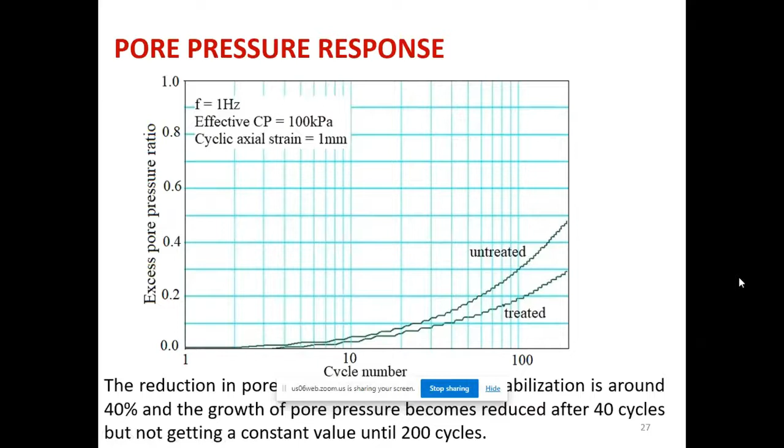The pore pressure response is like this. You can see, even after maybe 200-300 cycles, in the case of untreated soil the pore pressure ratio is increasing up to 50%. But if you come to treated soil, it is significantly reduced. That's why we can easily say that because of this nano treatment, it is resisting liquefaction as well as helping to reduce the pore water pressure because of gel formation.

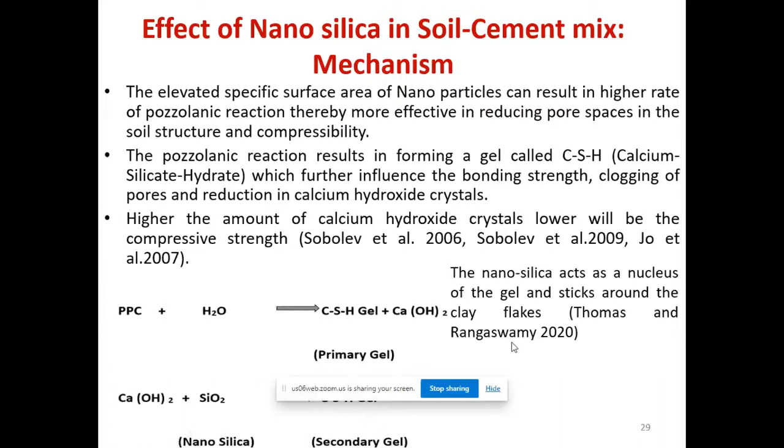So if you add nano silica, the remaining calcium hydroxide reacts with the nano silica, and it forms a secondary gel. This secondary gel is very strong to connect the particles and improve the dynamic properties of the soil. Based on that, you can also see the same result here.

So in summary, nano silica and biopolymer stabilization agents are really helping to improve the liquefaction resistance of the soil, as well as the dynamic properties of the soils.